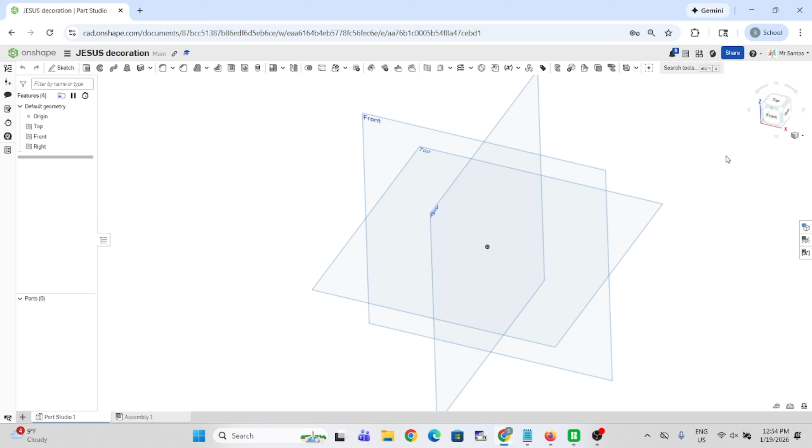On the left side, hide the front plane and the right plane. We'll work only with the top plane. Right-click the top plane and select View Normal to. Zoom in a little to make your work easier. I always like to start by defining the area where I will work. This helps me avoid size mistakes later.

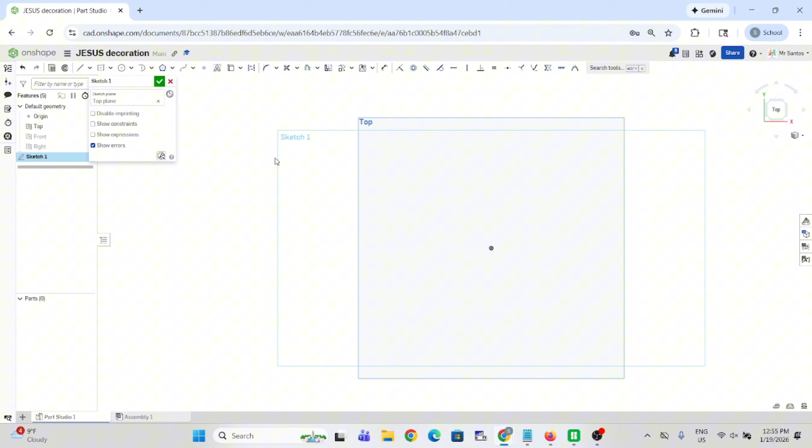Click the Sketch button and select the top plane. Turn on Construction and choose Center Point Rectangle. Click in the center and define the work area using the Dimension tool. For this project, the height of the letters will be about 5.5 inches, and each letter will fit inside a space that is 0.75 inches wide. This rectangle represents our working limit. You can always change these dimensions later if you want.

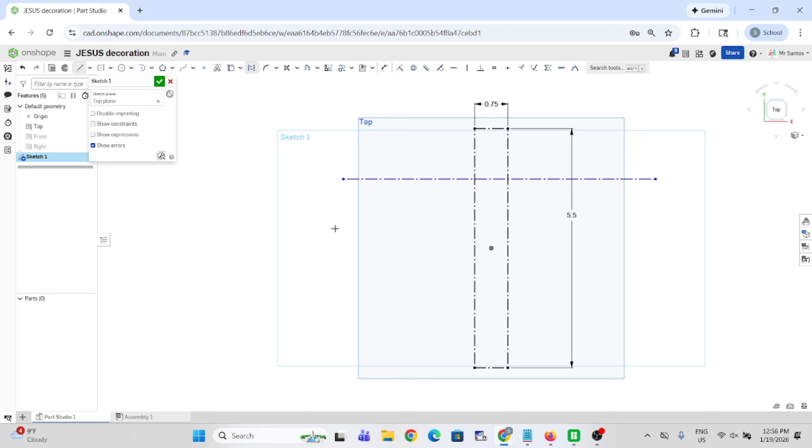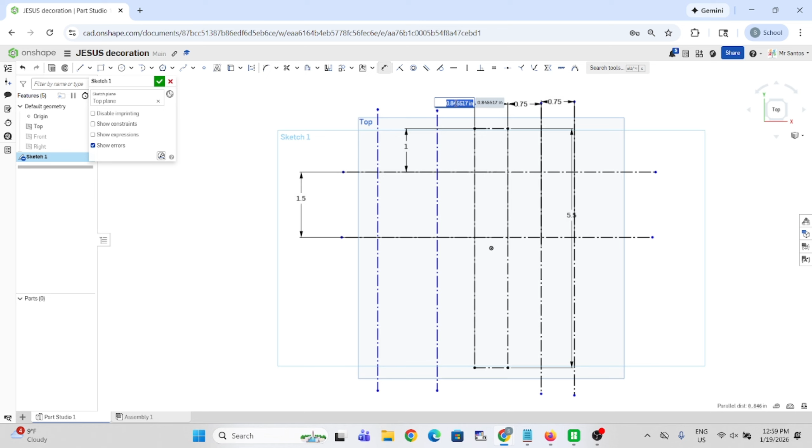Now add construction lines to define the spacing between the letters. Construction lines will not appear in the final print. They are only guides. Use the Dimension tool to set the spacing between each letter area to 0.75 inches. This design will have 5 letters, so we'll create 5 equal spaces. At any time, you can double-click a dimension and change it if you want. Now we'll start drawing the letters. We'll do everything in the same sketch to keep it simple.

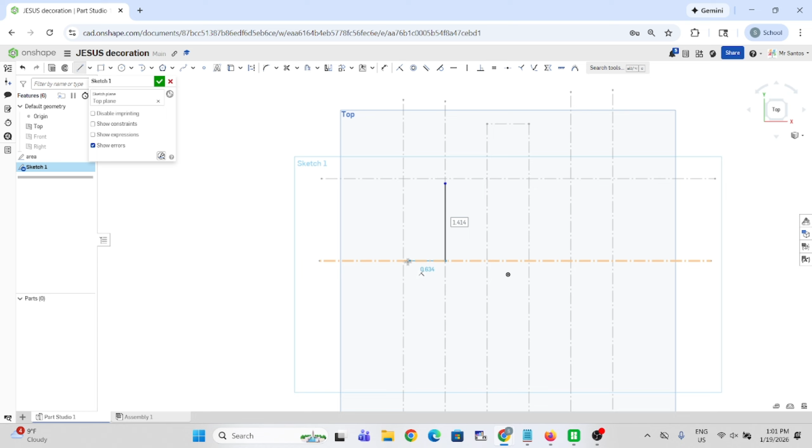Let's start with the first letter, the letter J. Select the Line tool. Zoom in a bit. Click on the guideline, move up, and start shaping the letter. This is just an example. You can design the letter however you like. Once the shape is closed, you'll see it shaded. That means it's ready for extrusion.

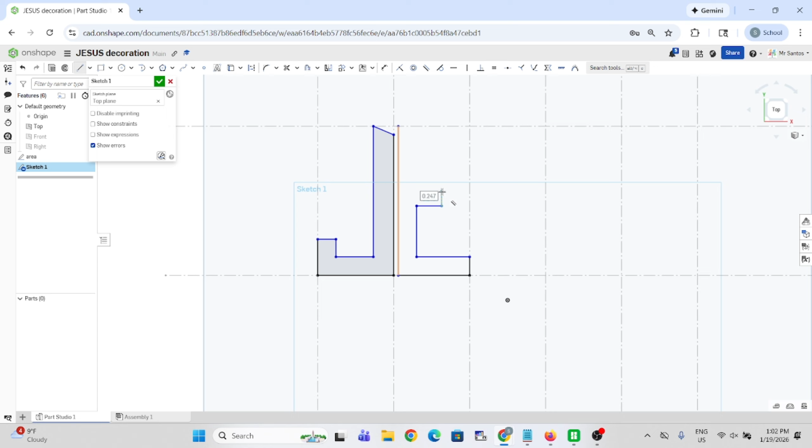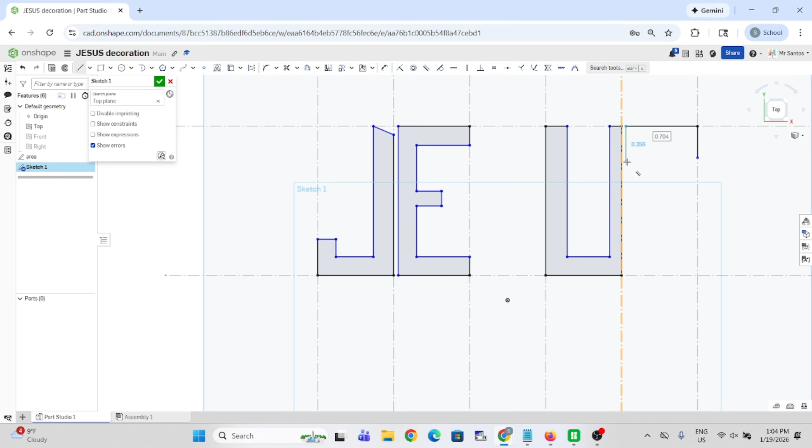Now move to the next letter and draw it using the same idea. If you want to keep the same height, move your mouse up without clicking and follow the alignment line that appears. Draw the letter the way you prefer. You can make it thinner, wider, taller, or shorter. It's your design. Repeat the process for the next letters, always staying within the limits we defined earlier. If you make a mistake, just press Ctrl+Z and try again. Each time a letter turns gray or shaded, it means the shape is closed and ready. Once all letters are complete, we now have our 2D design.

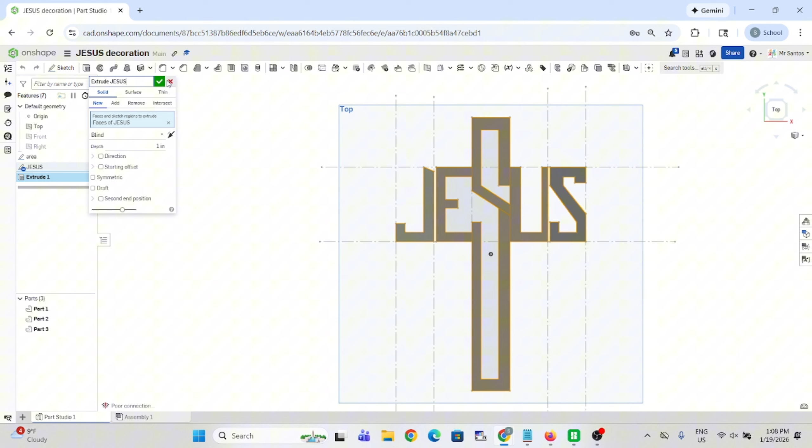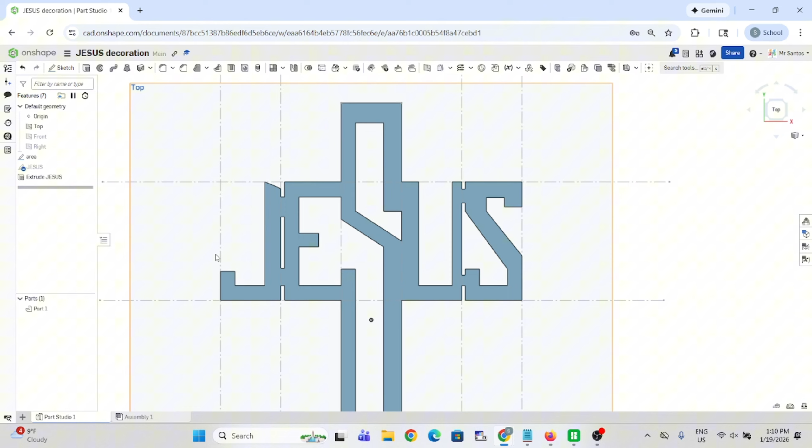Click Extrude. Onshape will automatically select the closed shapes. Set the extrusion distance to about 1 inch. Before confirming, rename this feature Extrude JESUS so it's easy to find later. Click Confirm. If you notice that some letters are not connected, don't worry. Double-click the sketch and add small connecting rectangles between the letters. These connectors prevent the letters from breaking apart after printing. Once everything is connected, exit the sketch and the model will update automatically.

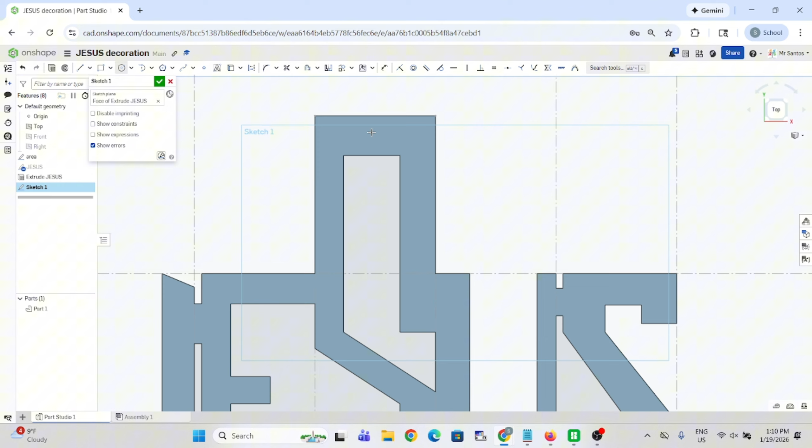Now let's create a hole so this piece can be hung on a wall or used as a keychain. Create a new sketch. Select the face where you want the hole. Choose Center Point Circle and draw a circle. Give it a size that makes sense for your project. Rename this sketch Circle. Now extrude it using Remove Material. If the hole looks too big, double-click the extrusion and reduce it.

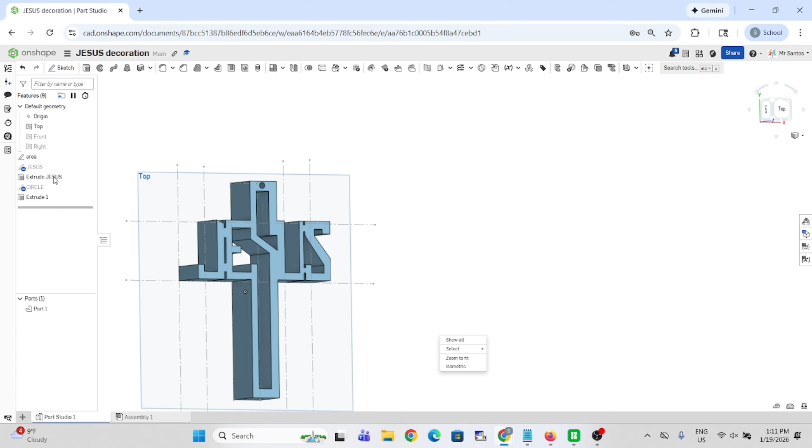Be careful not to place the hole too close to the edge because that can weaken the print. You can always adjust the size depending on whether you're using this as wall art, a keychain, or an accessory. And that's it.